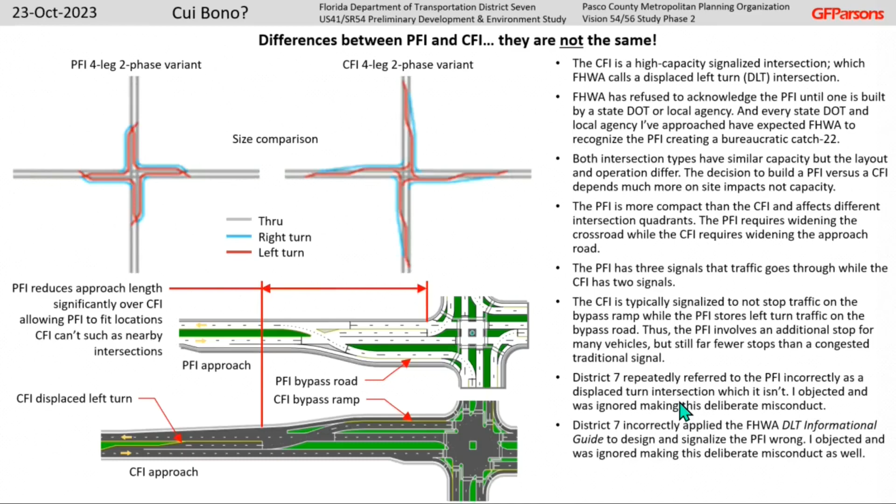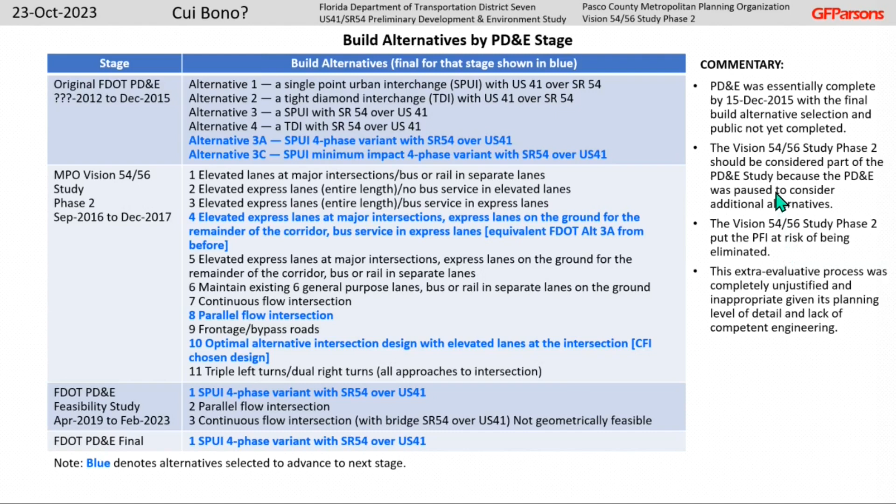Well, then the MPO will look at other options without a bridge. But they did it in an incompetent, in a wholly inappropriate way. And I was looking at the PFI getting eliminated at this point. So I say this extra evaluative process, which is what it was, was completely unjustified and inappropriate given the planning level of detail and lack of competent engineering. But the consequence of this pause ended up with the same alternatives I told FDOT, I told District 7, that they were going to have anyway.

So when I first proposed the PFI, or when I submitted my PFI concept proposal to FDOT, it was at that time I said, there's only two kinds of intersections that can work at this location. You've got your bridge identified. The only two intersections that have any possibility of working here are the PFI and CFI.

And I told them when they started this Vision 54/56 fiasco, they're going to end up with the SPUI, the PFI, and the CFI. And that's what happened. But it cost 10 years of delay. The opening year went from 2020 to 2030.

That meant 6 years after my patent expires that it would be opening to traffic, putting my patent fee in jeopardy. No one gave a damn. None of them cared at all. Not at all. 10-year delay.

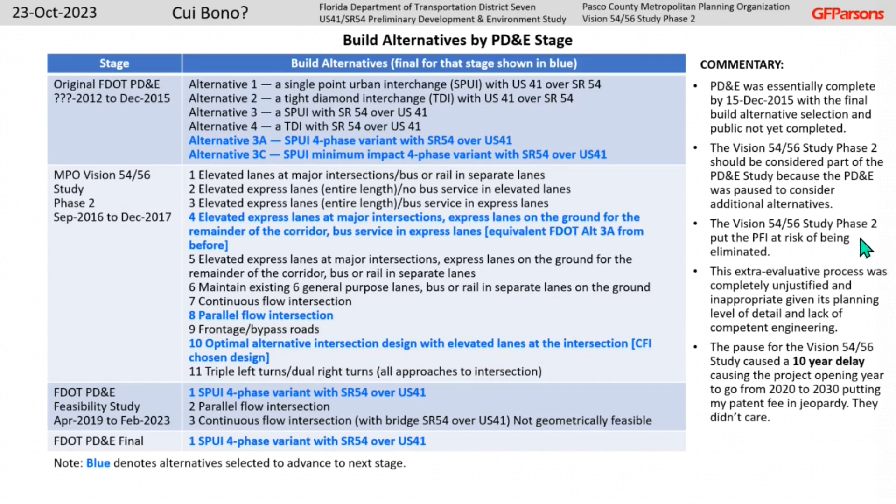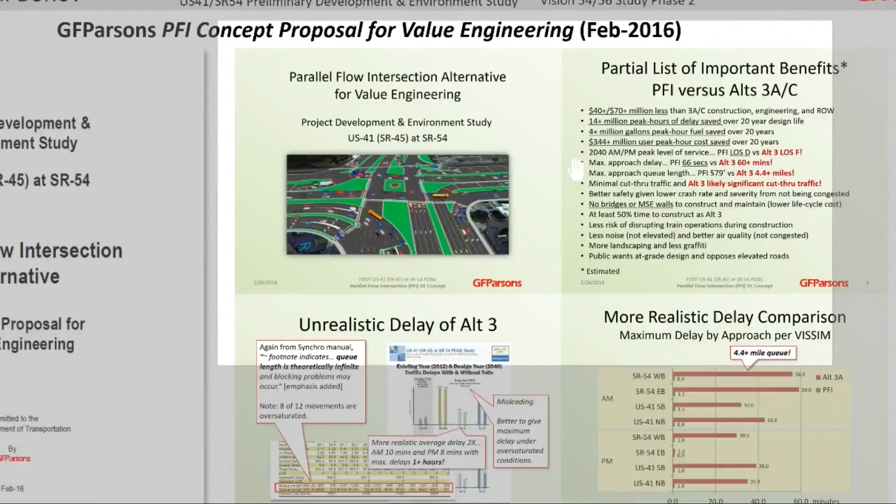Present was Kirk Bogan. He is a District 7 environmental management engineer and was serving at that time as the project manager. They've had several project managers on their study, and this was, I think, between project managers. So I gave an hour-long presentation, and at this presentation there were several other people present.

I made a mistake. I didn't ask for introductions, and Kirk did not offer any introductions. Bogan is the host, but he doesn't introduce me to the people in the room. Anyway, it was a misstep on my part. I should have insisted on knowing everybody who was there.

There were 4 others. 2 were consultants sitting next to him. The project manager for RS&H, they're the prime consultant, and then Domingo Noriega, the traffic engineer with AECOM, which is the traffic sub-consultant. So Noriega is the lead traffic engineer for the consultant side on the study.

Sitting next to me was Ali Atefi, traffic engineer or transportation engineer with the Pasco MPO. And on my other side, it was someone from FDOT. I don't remember his name. So I thought that everybody in the room was FDOT when I gave this presentation, but that wasn't the case.

Noriega just harangued me the entire time in a very combative, when-did-you-stop-beating-your-wife questioning. Everything I was saying, he was incredulous. He was in disbelief. Oh, I can't believe that. That doesn't sound right. It would be better if you did it this way or that way. This is the first time that he's seen anything about the PFI. He's telling me how it can be done differently, how it should function differently, how it won't work.

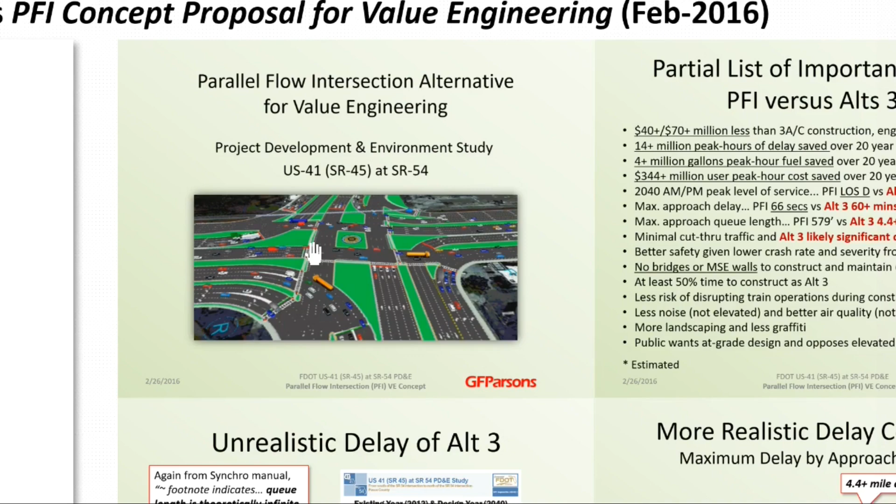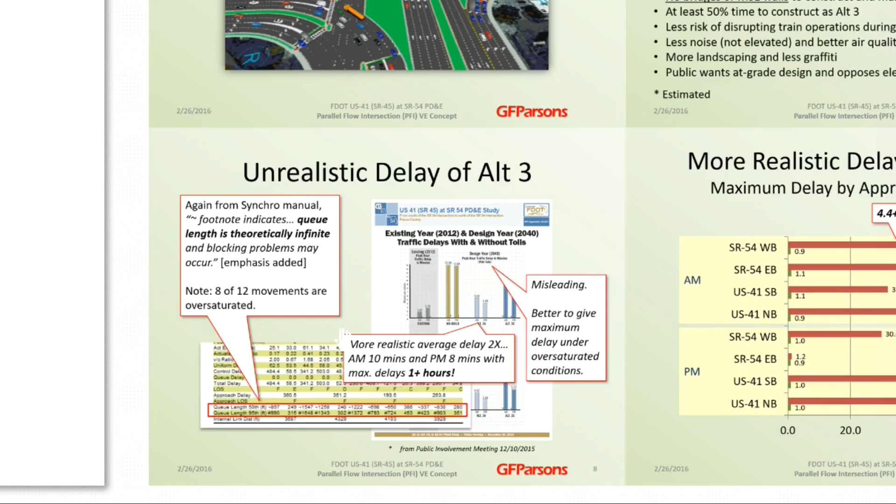Well, in order for me to compare the PFI to the SPUI, I had to model their SPUI alternative with VISSIM also, which gave me different results. And I had to explain this to them. Afterwards, I realized it was a waste of time because Kirk didn't care in the first place. He kept nodding off the whole time. He was falling asleep while this guy was harassing me.

I thought they were all FDOT. I was trying to be very polite, trying to respond to his questions. I should have stopped him and said, hey, could you please wait till I'm done to ask your questions? Again, I just didn't have the presence of mind to do that. So I just suffered through the presentation with this guy.

Anyway, I have a graphic that I show that provides the output from Synchro, and it shows that at the SPUI signal, all the movements practically are what's called oversaturated. They're congested. What that means is that if 10 cars are trying to get through the signal in one phase and only 8 make it, 2 are left behind, then it's oversaturated.

And under that condition, if it's that way through the entire hour, then that means every cycle of the signal there's vehicles left behind, which makes for a longer and longer queue. So I'm sure you've arrived at an intersection and traffic's backed up, and it's because only a few cars get through the light with any given green phase. Well, that's an oversaturated condition.

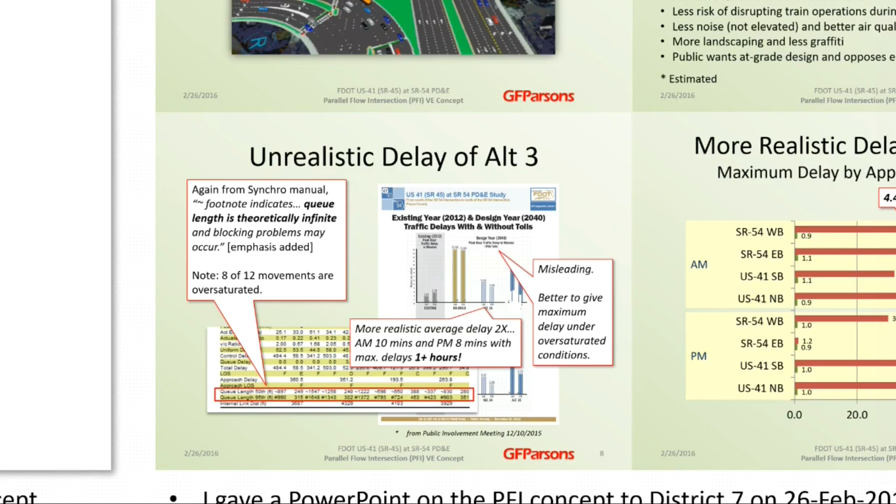So that's what I bring up at this presentation. Well, Bogan doesn't care. He's like, whatever, I could just see his eyes rolling practically. And the other guy is just ignoring that part of it and telling me how my PFI doesn't work because of all these things that are wrong with it.

Okay. So then I show this graphic here, this bar graph, that shows the delay by movement. So there's State Route 54 westbound, eastbound, and this is by hour too. So these are approaches. So this is approach delay. 41 southbound, 41 northbound, and then for the morning and then the PM.

Well, you can see that what they had at that time, I modeled it. I got almost an hour of delay, 54 eastbound. And mainly that was happening, I think, because there was blocking going on where people couldn't even get to the bridge because the ramps were backed up so far, blocking access to the bridge. Yeah, and then for the maximum amount of delay at the PFI was a minute versus an hour. And Bogan didn't care. It's like, whatever.

Okay. I would think that would raise some eyebrows, that would be like, this is something we really need to take a look at. Their position could be, well, this guy, Parsons, is full of crap. He's just lying to us to try to get us to build his intersection and get his money, which I wouldn't do and would be stupid of me to even try to do. But even if they believe that, they would say, but what we should do is take a look at this and give it some honest consideration, because that is a big difference that would make for a much better project. So at least let's give it some consideration. Nah, they didn't want to do it.

So it just so happens that next to me is Ali Atefi from the MPO, and he's their manager of the Vision 5456 study that's ongoing that I knew nothing about. That's a corridor study of State Route 54 from Zephyrhills, which is east of I-75, to New Port Richey. So it's like a 30-mile corridor, and I-75 would be on that corridor.

So the agenda of the MPO board is to manipulate the NEPA process in order to game the system to get their freeway, to turn 54 into a freeway. That's the agenda. But there are rules that have to be followed, and there's a procedure. So it's all about, how can we game the system to get our desired outcome. And Secretary Gwynn and the district is all on board with that.

Gwynn knows what's going on, but he's not going to rock the boat, even though he's the district secretary and he's in charge of FDOT in the Tampa area. He's a political creature and a bureaucrat. So why should he try to do the right thing?

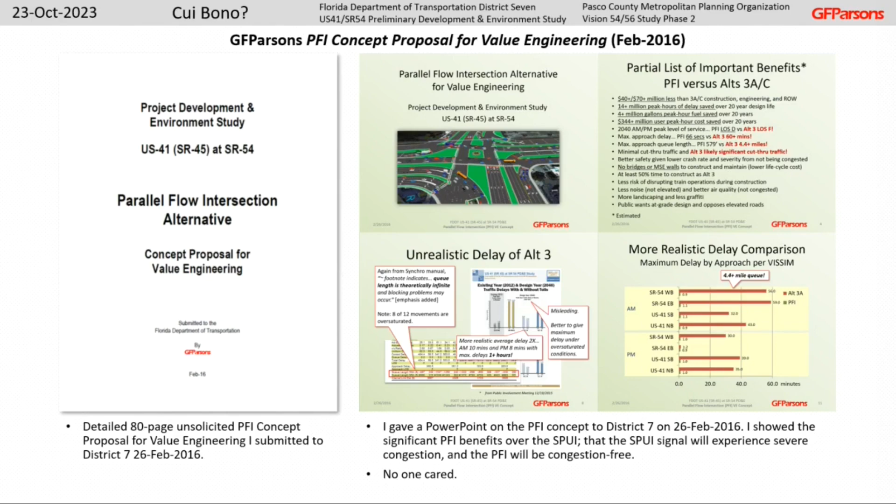So Atefi, at the end of my meeting with Bogan, tells me as we're leaving that there's this Vision 5456 study. There's two task forces, an East Task Force and a West Task Force. So he invites me to present the PFI to these task forces. Now, I didn't understand the significance of this at that time. I just thought that was a separate thing, had nothing to do with the PD&E. FDOT's doing their thing. Pasco MPO's doing their thing. Okay? They're looking at the corridor. It's got nothing to do with the intersection. The intersection's on the corridor.

But a corridor study like that, if they were going to convert that road into a freeway, it's decades away. If ever. It's pie in the sky. It's make-believe, it's playtime for politicians to pontificate, to make themselves noticed. Okay. But is it being realistic at all that they're going to convert this road to a freeway anytime soon?

So the PD&E is an immediate concern to fix that intersection today. Turning that road into a freeway is maybe by like 2050. So that's why it didn't compute with me. But it's like, okay, fine. I want to expose the PFI, and it would be an opportunity for me to get the PFI in front of people up in the area.

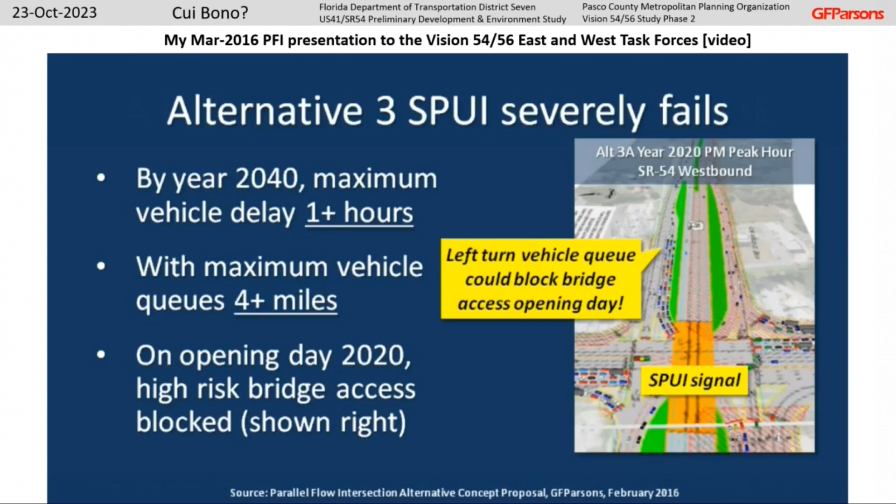So anyway, 15,000 vehicles per hour are projected to still use the signal even with the bridge. The current FDOT alternatives 3A and C use a single point urban interchange design, or SPUI, with bridge over 41. Even on opening day, the SPUI signal can be expected to be severely congested, to such a degree that during peak hours, access to the new bridge could be blocked by excessive vehicle queuing, and by year 2040, maximum delays of over an hour and maximum vehicle queues of over 4 miles could be experienced. And FDOT isn't at fault here. Given the extremely heavy traffic volumes and site constraints, the SPUI is likely the best alternative with a bridge.

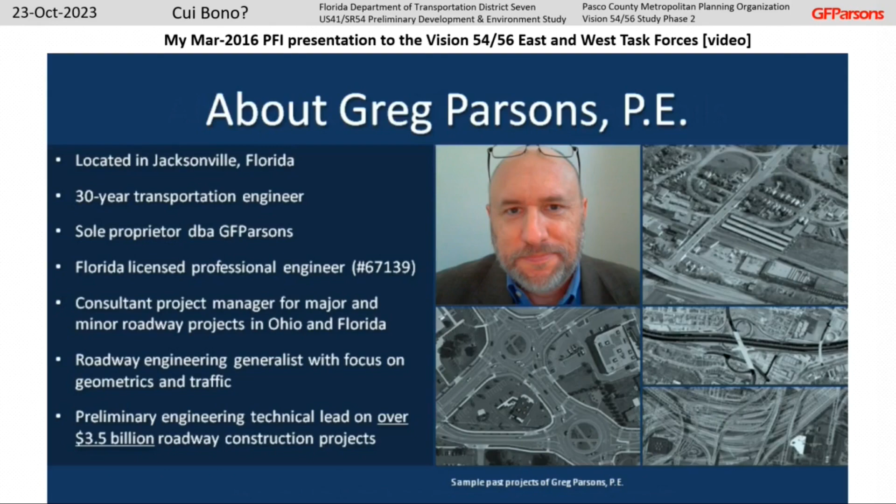My name is Greg Parsons. I'm a 30-year licensed transportation engineering professional located in Jacksonville. In this brief video, I'll present a design alternative for the 41-54 intersection that can work, has no bridges or retaining walls, and costs much less using my patented parallel flow intersection, or PFI. PFI is a new, innovative, very high-capacity signalized intersection I conceived in 2004 and for which I received a U.S. patent in 2006. And this is how it works.

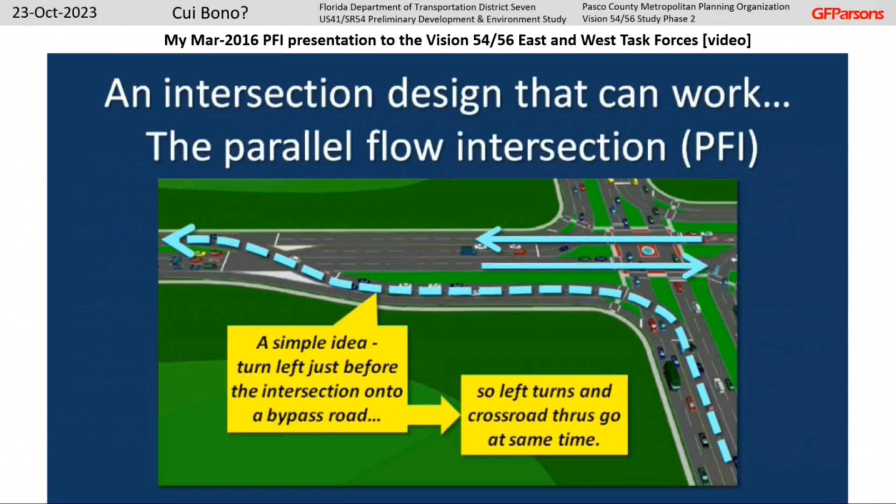Left turns are removed from the main intersection by turning onto a bypass road parallel and adjacent to the crossroad. It's a simple arrangement where drivers are able to turn left to go left, concurrently with crossroad through traffic. Doing so reduces the number of signal phases to 2 per cycle for much greater efficiency. What this means is the PFI produces twice as much green time at the signal than the Alt3 SPUI signal. And here's the PFI viewed from the south over 41.

So I'll interrupt it here. This is my original concept design for the PFI based on their 2040 design year traffic. So, as I said, they had almost 19,000 vehicles per hour, which meant that the PFI was going to have more lanes. So what you'll see with this design is quad turns, 4-lane bypass roads. Yeah, there were a lot of lanes. Does that mean it can't work? No. It means it needs to be evaluated carefully.

4 lanes exist on roadways. If you go to the UK, they have roundabouts that are 4 lanes, maybe even 5 lanes. They work. I don't know how well they work, but they work. So you can't say that, well, I've got 4 lanes on my bypass roads with turning movements, therefore that's a bad idea, that doesn't work. Without evaluating it, no. There's a quad turn here in Jacksonville, not far from where I live. I've driven through it many times. It works fine. It's on a ramp. It's a 4-lane right turn.

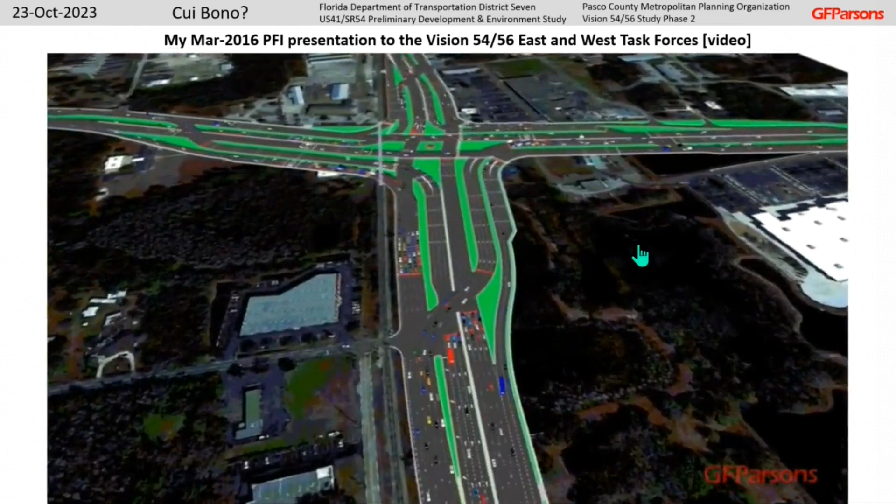A snippet of video from a traffic microsimulation I prepared using design year 2040 AM peak hour traffic volumes from the FDOT PD&E study. Here it's running at 3 times real time. The full video running at slower speed can be viewed on my YouTube channel. Just search for GF Parsons.

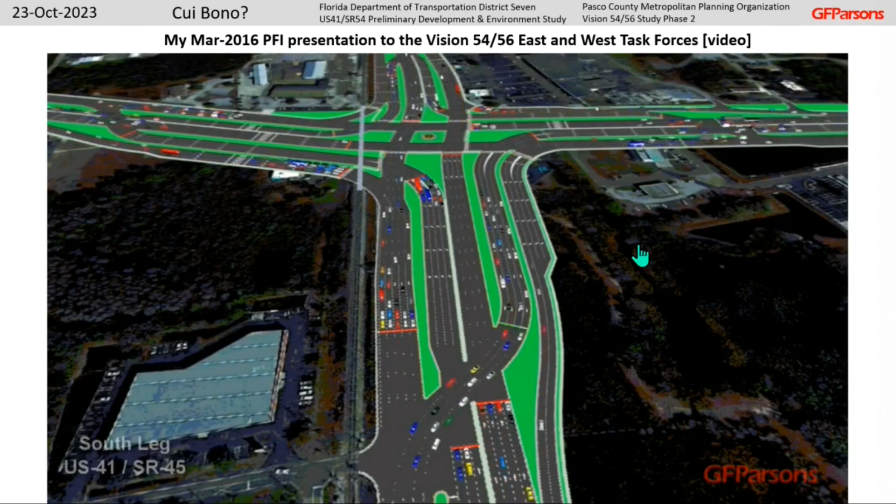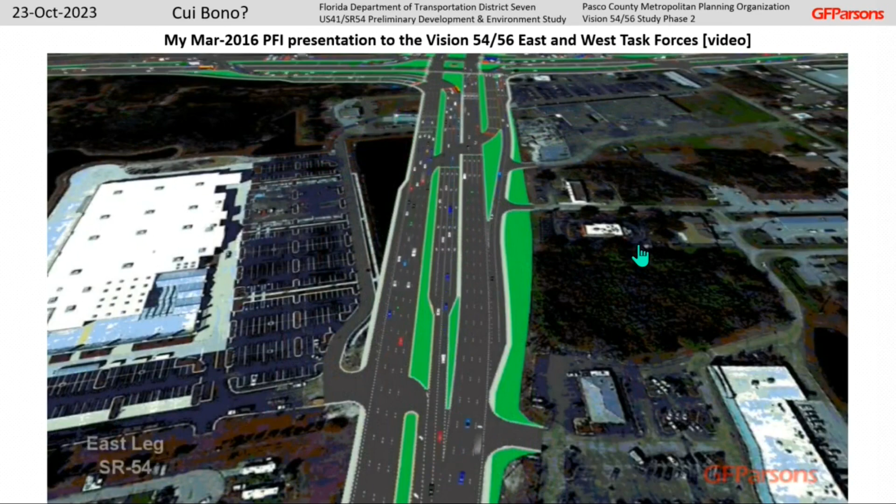Note the left turns are concurrent with the crossroad through movements. No congested movements, no excessive queuing, maximum delay about a minute through year 2040. Left turns are direct and intuitive, occurring just short of the main junction. Now the PFI viewed from the east over 54. Lowe's is on the left side. Traffic still flowing. Let's zoom into the main junction for a close-up.

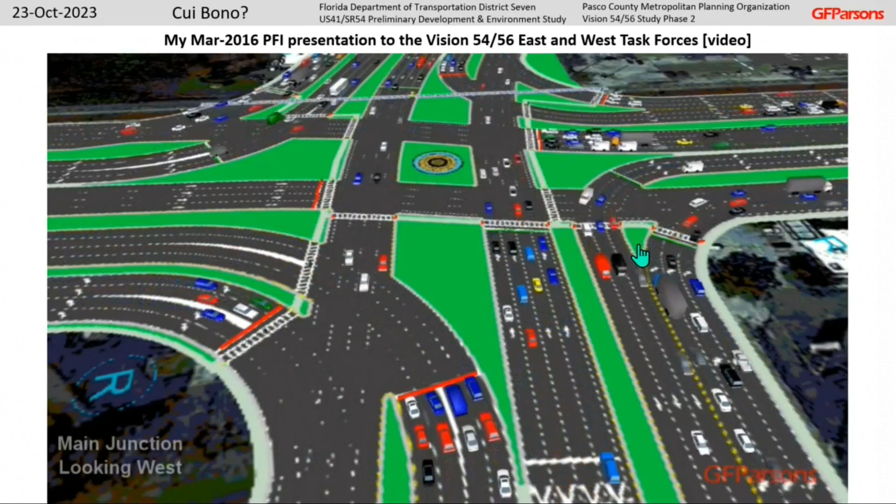The PFI is wide, but no wider than Alt 3A. It's basically a 2-dimensional interchange, but the PFI is shorter on the approaches, resulting in fewer relocations and access impacts. Note the large islands the PFI provides at the main junction, making for safer pedestrian crossings. The islands can also... So I modeled pedestrians as well. You can see pedestrians are crossing here.

This is an ongoing theme over the entire 7 years. The innuendo and suggestion by the FDOT and MPO officials that the PFI is not safe for pedestrians. Now, based on no engineering whatsoever, or what engineering they did do, it was wrong. Okay? It's just, well, just look at it. It looks unsafe for pedestrians. Well, in what way? In what way?

I mean, you have a maximum of 4 lanes in this version of the PFI. There's 4 lanes to cross. Traffic is coming only from one direction, and there are islands for pedestrians for refuge. It's a big intersection, but it's broken up. You could say the same thing about 2 closely spaced intersections where people have to cross, or where ramps intersect the road near an intersection. They may have to cross multiple times, in multiple stages to get across more than one road. Well, that's not really so different than this.

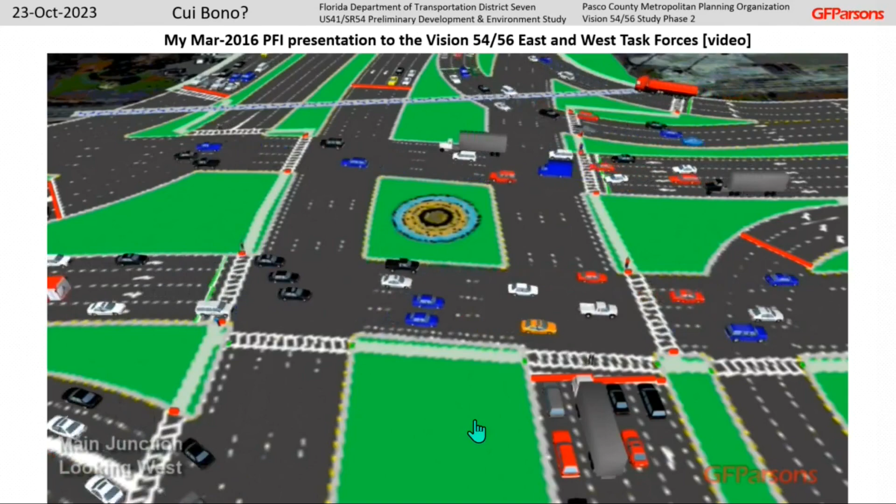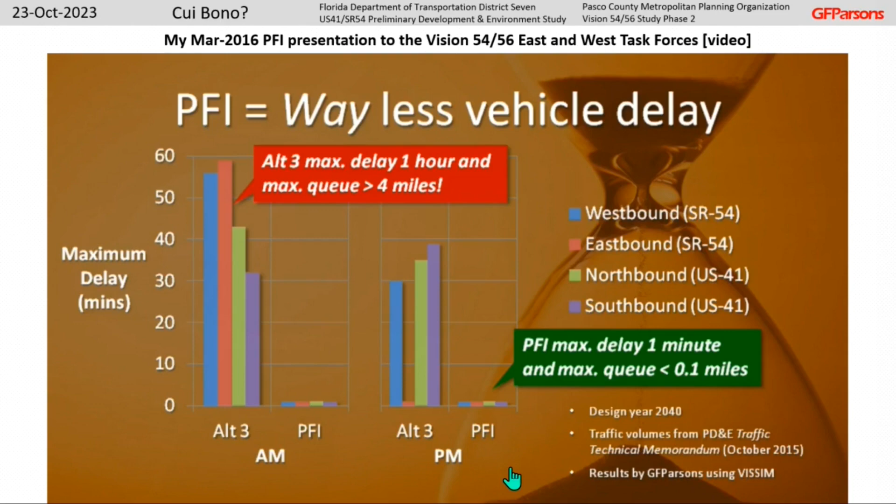This graph shows the dramatic difference in maximum vehicle delays expected during peak periods by year 2040 between the PFI and SPUI at the signal, a minute versus an hour. This is because the PFI doesn't get congested, and less congestion means fewer crashes and cleaner air.

And over the 20-year design life of the PFI, all that delay savings really adds up. Over 14 million hours of delay, over 4 million gallons of gas, over $344 million in cost savings for the traveling public. And that's for only the 2 peak hours 5 days a week. The total savings will be much greater given that by 2030 the SPUI signal can be expected to be congested most of the day.

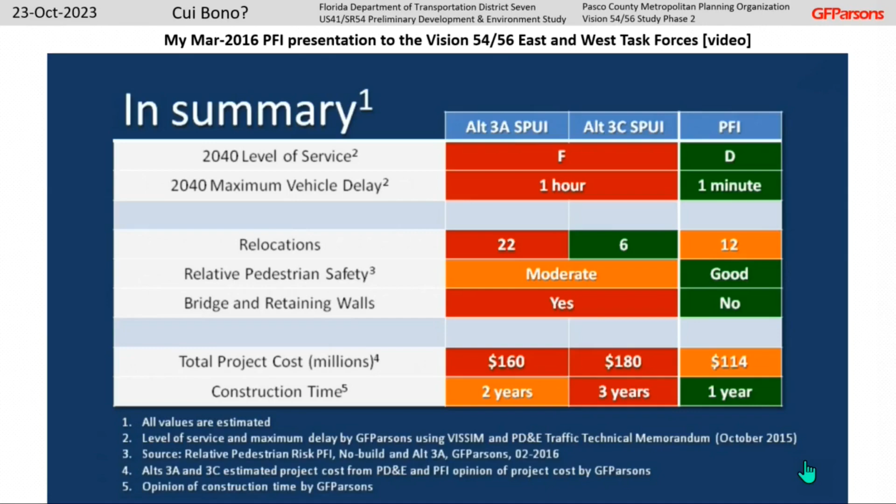Here's a rundown of how the SPUI alts and PFI stack up. The SPUI with severe congestion versus the PFI with no congestion. Many relocations for 3A versus the PFI's moderate number. Fewest relocations for 3C, but with an over 3,000 foot long bridge instead. The PFI can provide a safer pedestrian environment. The PFI has less visual impact with no bridge and no retaining walls, and the PFI at much lower project cost and much less construction time.

The PFI is new, and new can be intimidating, but either try something new here that can work, or be reminded every day for the next 20 plus years that the SPUI can't, at a cost of $40+ million more, as you look up at what could be a mostly empty bridge because it's blocked, maybe for up to an hour while you creep in queue to get through the failed signal. So if you want to see the PFI constructed at the US 41 SR 54 intersection, contact the Florida Department of Transportation and let them know.